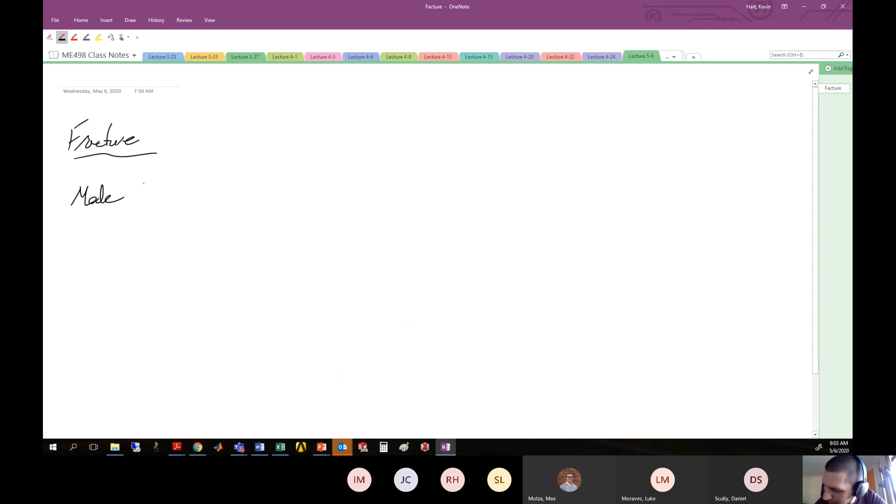All right, so we're in the middle of our fracture mechanics discussion, and we were really looking at mode 1 fracture of composites. I showed some real life pictures of the tests in action for this mode 1 testing of composites, so I just want to reiterate what those look like.

You've got a sample that looks like this, which is the double cantilever beam sample. I showed what one of these is, kind of in my hands, in class on Wednesday. So I've got one here. I wish I could pass it around to you guys, but I can't, because then we would all get a virus, and that's bad.

The general idea here is that you've got this composite that is here—maybe I should do that in red. Here is the composite that you've created. Then you put into it a pre-crack, this initiation crack, usually with some thin Teflon piece during the manufacturing process. Then you apply piano hinges to it by gluing or epoxying them on, and when you pull on those piano hinges, the sample opens up in mode 1.

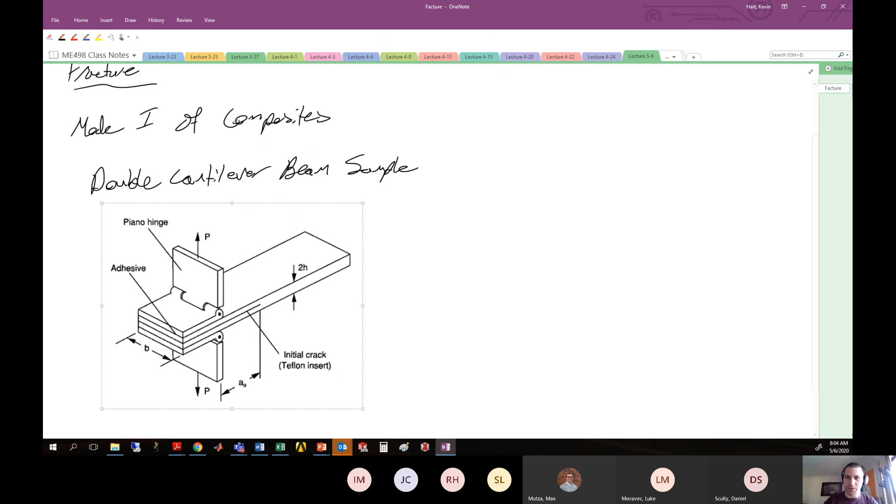So when you pull on those hinges, you get something that looks like this. Here we have things like initial crack length. Here, this is the applied load. Here, this is crosshead displacement. And here you have width.

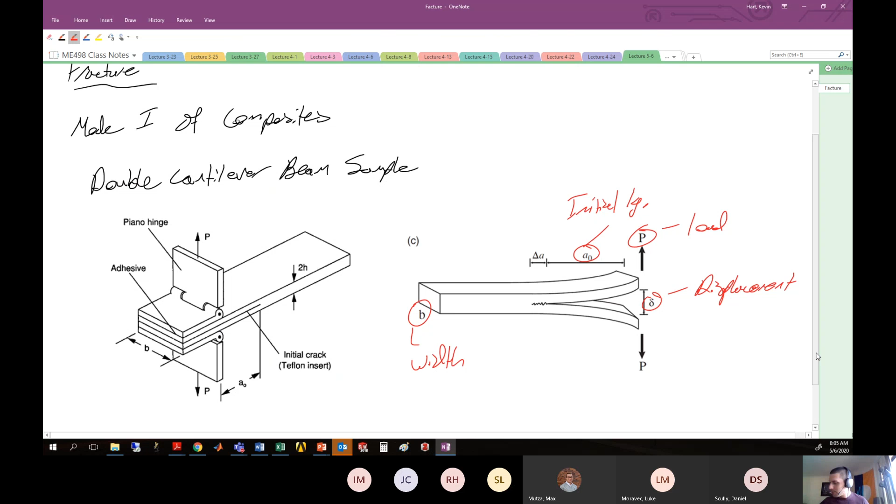So these are the common sample geometries for mode 1 fracture testing. If you ever do mode 1 fracture testing of composites in your life, you will make a zillion of these. In graduate school, I probably made, I don't know, 300 of those things, maybe more. Yeah, many, right? Okay, so there you go—that's the double cantilever beam specimen.

When you pull on that and test it, you're going to track the crack and how it propagates on the side of the sample, then marry up crack advance with load and displacement to calculate critical strain energy release rate. So data that might come from that is going to look like this.

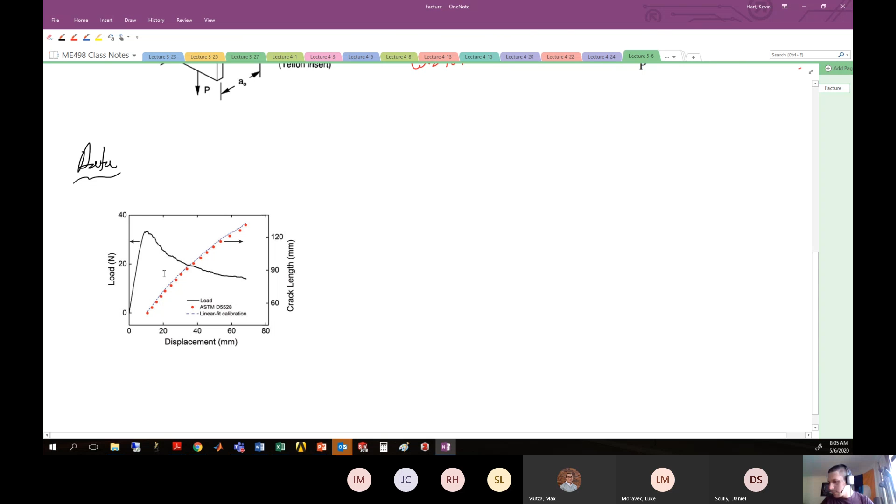All right, we're in black here. We have the load displacement curve. So we're loading, loading, loading, loading. And then at some point, we're getting to a point where the crack is now going to propagate.

So we're pulling, pulling, pulling, pulling. And then all of a sudden, we get some crack advance starting to happen. And right when this point occurs, the sample is relieving itself by creating a free surface.

And so we're moving down here and we're looking at, all right, what is the current crack length? So that's kind of the right-hand side y-axis here, as we are opening the sample up. Okay, so you can match each one of these, like 5 millimeters of crack advance,

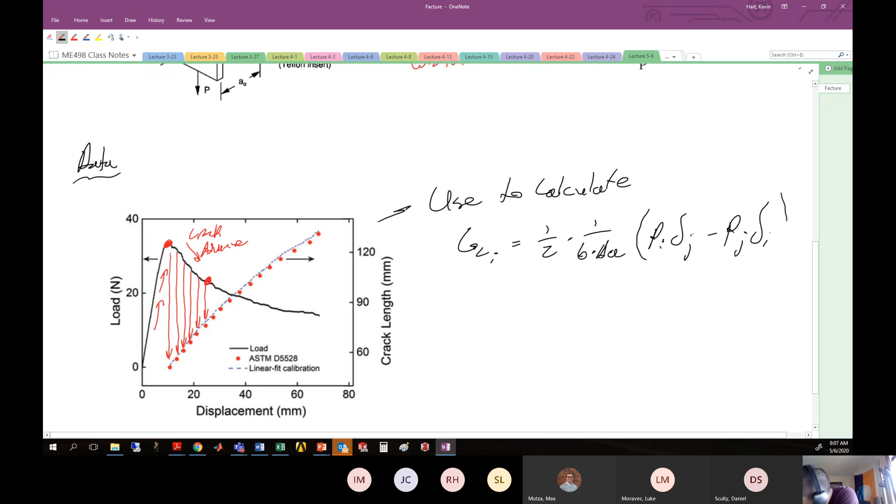with a various load displacement value. So here's my load displacement value for a crack length of there, and you can use all this information to calculate the critical fracture toughness of the ith event, which we said was GCI, here equal to 1/2 times 1 on B times delta A multiplied by PI delta J minus PJ delta I. All right, so there's your fracture toughness, your critical strain energy release rate at each individual event.

And from there, you can construct the R curve, which plots the crack advance delta AI versus GCI. And this gives you a lot of general information about what's happening with the sample.

And that R curve looks something like this. All right, so this is an example R curve. Notice here that it is generally flat, okay, indicating that we have like an elastic material.

And typical values for critical strain energy release rate of composites are anywhere in the 200 to 1,000 range. So here you see 400, and this is specifically for an 8 harness satin weave glass epoxy composite, but it can be, you know, this guy's maybe got an average of like 410, something like that. So you get the general idea of approximately what these values are.

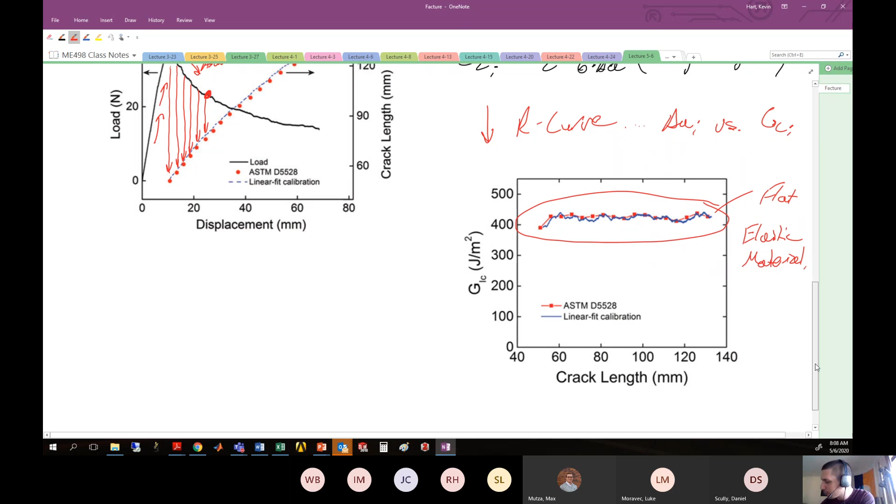And remember here, it's in units of joules per meter squared, the amount of energy required to open a certain crack opening area. All right, so there we go with some mode 1 fracture testing to determine critical strain energy release rate.

And I promise you, if you do anything in composites developing new materials, you will do so many of these tests. You will be sick of them by the end of your life. You're going to be gluing piano tabs on from now until forever.

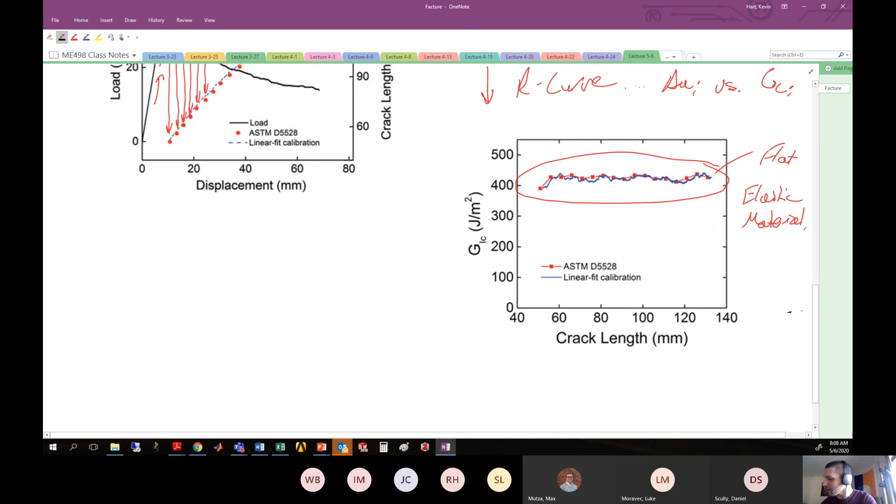All right, so that was all sort of mode 1 stuff. We did an example problem and looked at how this might actually proceed. And I realized there was kind of like a mistake in the order of magnitude of the example problem. So I was in the process of uploading or re-uploading the notes when lecture started.

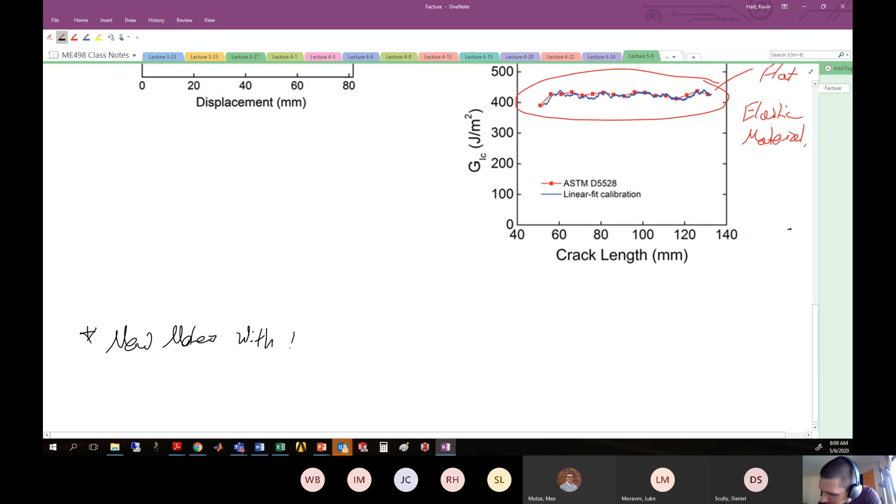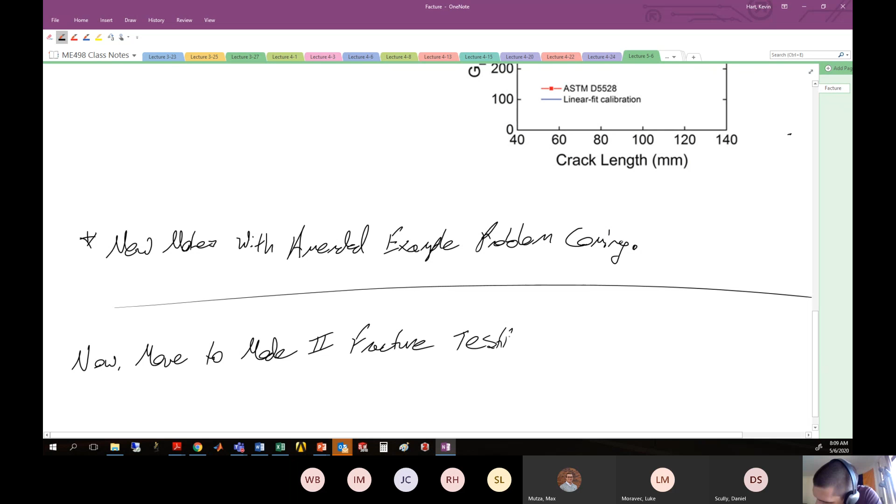All right, so moving on, that was mode 1 testing. Now we want to go to mode 2 testing. And so mode 1, we had the double cantilever beam specimen that was the specimen of choice.

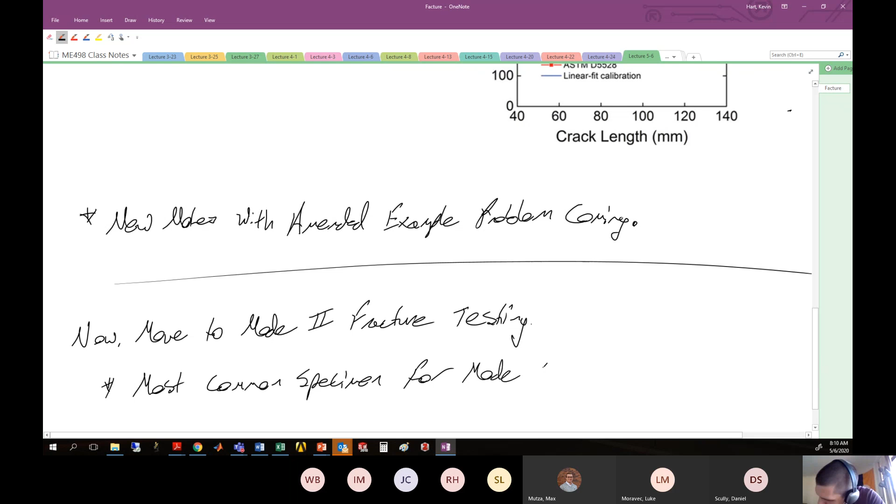And I'll say here, the most common specimen for mode 2 test is what's called the end notch flexure or edge notch flexure, all right, often abbreviated ENF. All right, so let's take a look at what that sample geometry is.

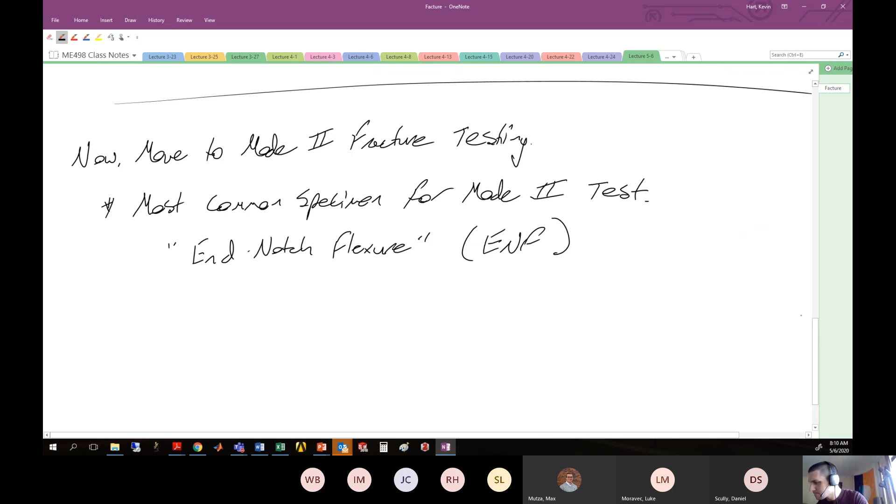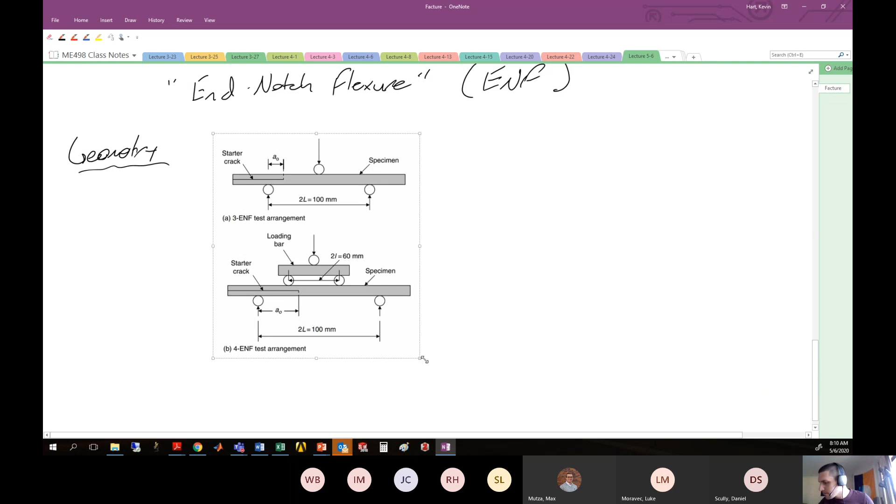All right, so the geometry looks something like this. All right, so this looks a little bit different than the mode 1 test. So the mode 1 test, you just take this guy and pull it open in tension, okay? For the edge notch flexure, you're actually putting this into a 4-point bend or a 3-point bend configuration. So here we have 3-point bend configuration.

And that's called the 3ENF. And then here we have 4-point bend, or what we can see here is 4ENF, right? Edge notch flexure or end notch flexure.

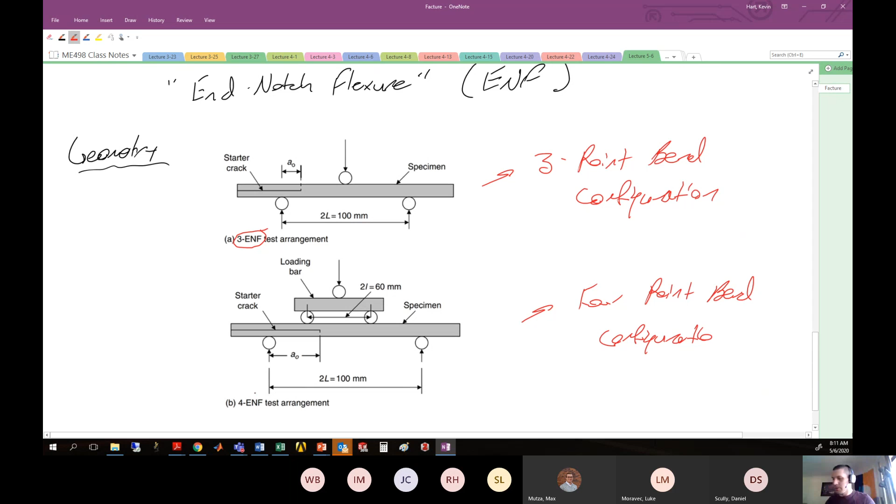So the idea behind this particular geometry is end notch flexure. We put our starter crack on the edge of the sample and it moves its way in. Both of these samples have the same general idea: a starter crack that starts at the end of the sample and moves its way in.

So the samples look basically exactly the same as the double cantilever beam specimen. You've got the starter crack initiating from one of the thin edges and moving its way in. That starter crack is usually made by inserting a piece of Teflon or thin film during the manufacturing process of this laminate or woven structure.

So you have that starter crack in there, and that initial crack length is a0. That initial crack length is the distance between the pin where it's loaded and the edge of the crack. So here we have our loads: here's P on 2, here's P on 2, and here's P, which is being applied to this specimen. So what's going to happen here is just like the deck of cards example.

I got them today. All right, so I'm gonna move to the document camera. Actually, my laptop camera. Where's Teams? Where are you?

Okay, I have props today. So this is a stack of cards, right? The idea here is that if I put this into a 3-point bend, which I'm going to do right now, each one of those layers is like sliding against each other. Might be a little difficult to see, but hopefully we can see that.

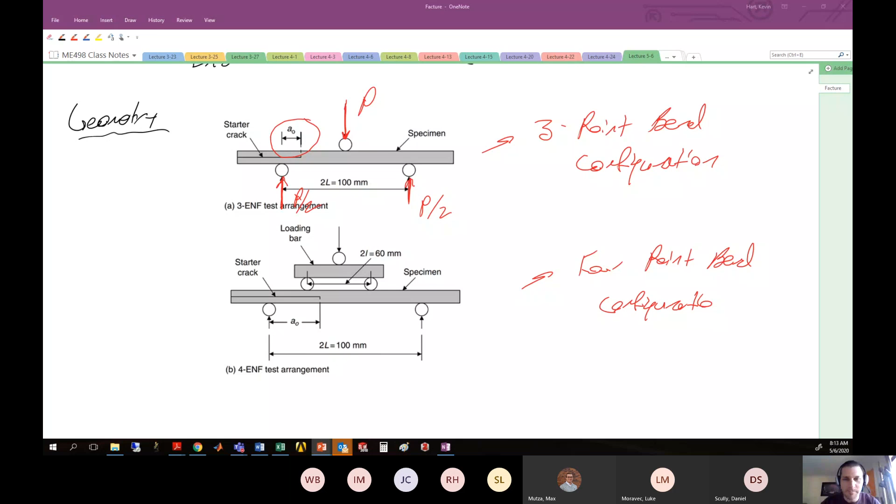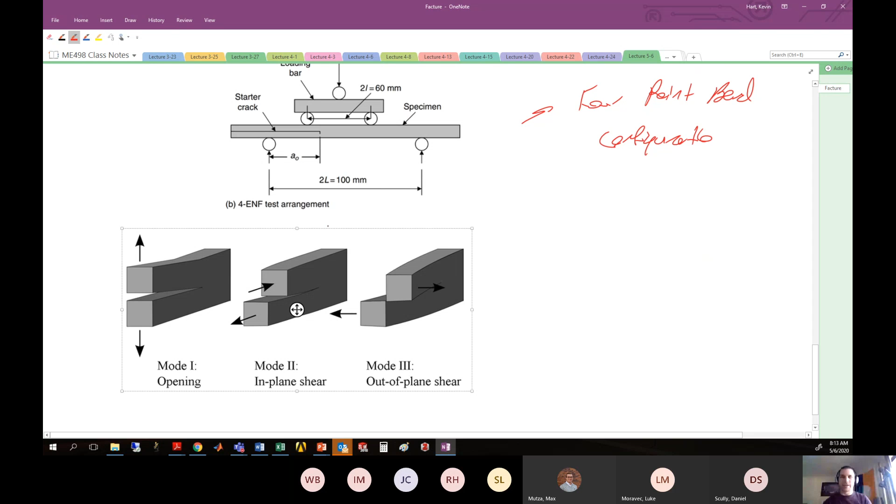So that's what's happening with this end notch flexure sample. Right at the midplane here, these guys are trying to slide against each other like this. That's that kind of shearing type failure.

So you can do this in 3-point bend, you can do this in 4-point bend. 4-point bend is more common because of how the stress distribution is distributed inside of the piece. But generally they're more or less the same. So these are the general samples and what they look like.

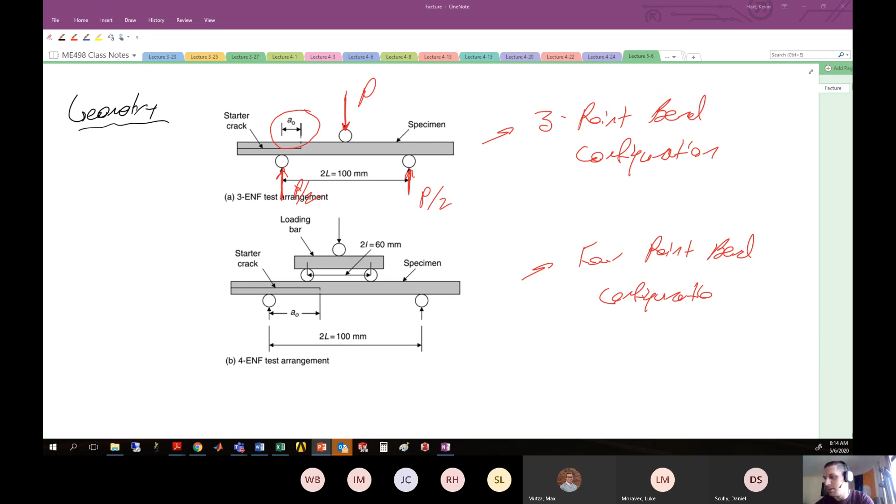Back to it. The same idea kind of holds here: when we apply this bending load, we're going to supply energy to the sample. So the analysis is more or less the same. I'll say 4ENF is more commonly used.

And that's because of a more stable stress state.

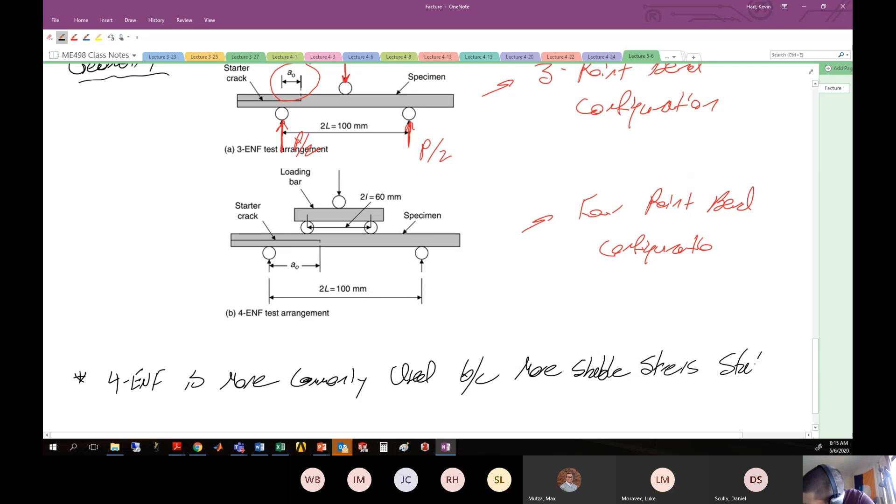Just to remind you what it means to be in 3-point or 4-point bend, go back to your bending moment diagrams. Here's the moment as a function of x, here's the moment as a function of x - this is for 3-point bend, this is for 4-point bend down here. Your bending moment diagram for 3-point bend looks something like this. For 4-point bend, it looks something like this.

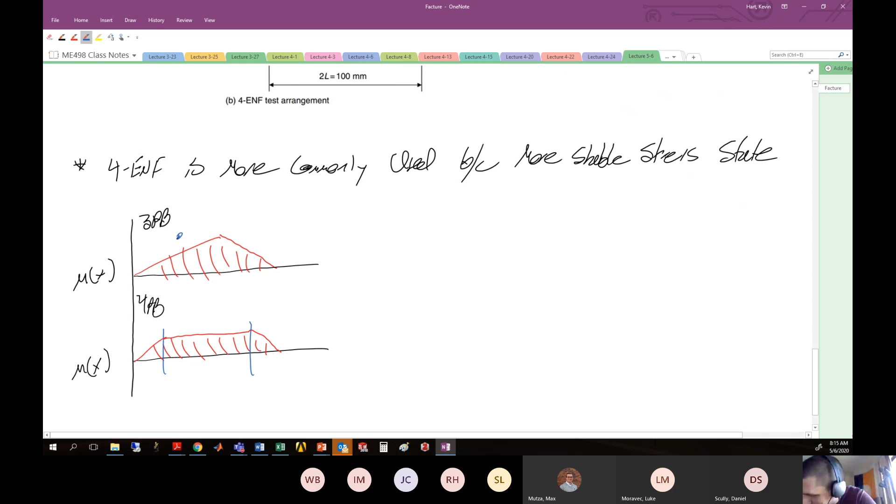So what I mean by it's more stable is that if you're trying to propagate a crack in 4-point bend, if you have a stress state that is constant inside of this region, it's much easier to handle. As opposed to, let's say my crack is here and then it's moving a little bit, now it's here, moving a little bit, now it's here - well, I'm changing the stress state at that particular location.

Not so great. And since we're a little bit more concerned about shear, the shear diagrams are also telling. So remember your shear diagram, something like V of x, for 3-point and 4-point bend. For 3-point bend, you have something that looks like this. And for 4-point bend, you have something that looks like this.

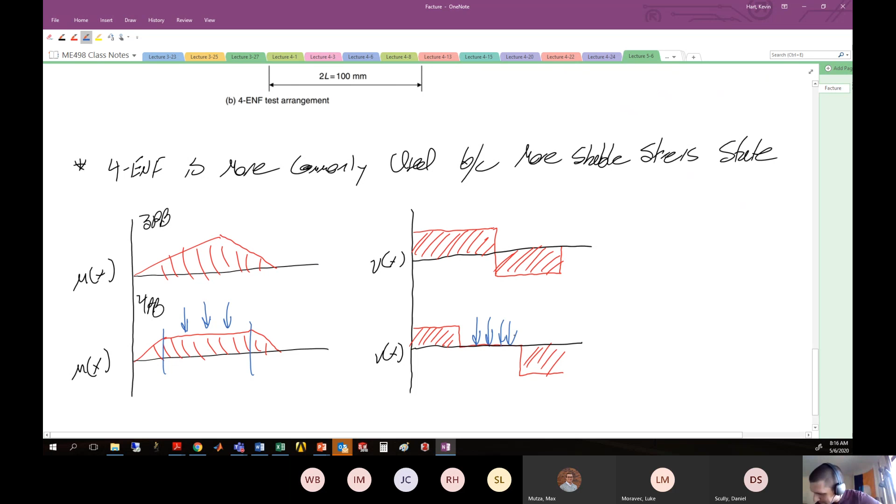So remember back to your statics days where you drew these shear and bending moment diagrams. For 3-point bend and 4-point bend, you have moment and shear diagrams that look something like this. It's a little bit more stable to be testing a composite in 4-point bend in this region here, because your stress states are generally steady. Hopefully we see and understand that. So 4-point bend is most commonly used. Now, the idea of what we're doing here is more or less the same.

We're supplying or putting work into the sample by loading it in this bending mode. And the energy that we apply to it through this external work has to be balanced by the elastic energy and the energy from fracture. So we'll say if brittle...

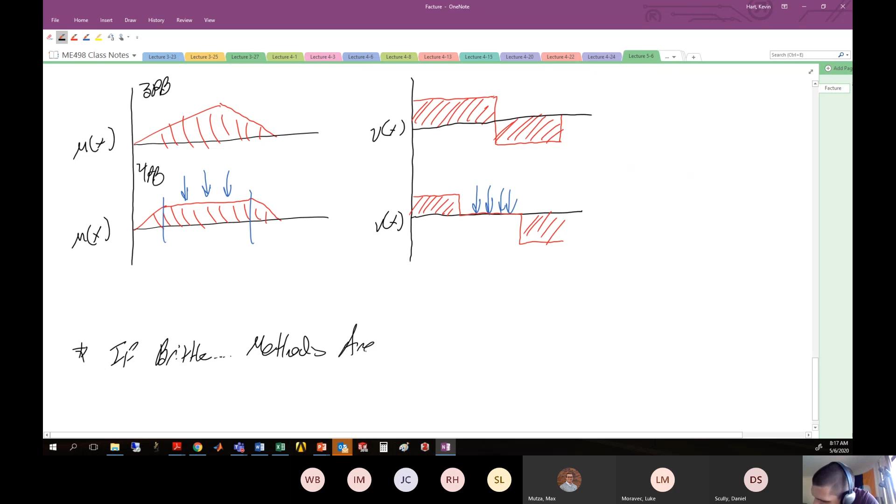Methods are the same. That is, the total work that we put in has to be equal to the elastic energy plus the energy of fracture, balanced by elastic energy and whatever work we did for fracture. So the general idea here is the same. The energy of fracture D is equal to the total work minus the elastic energy that we recover. It's the same general idea, and we saw this with the double cantilever beam specimen.

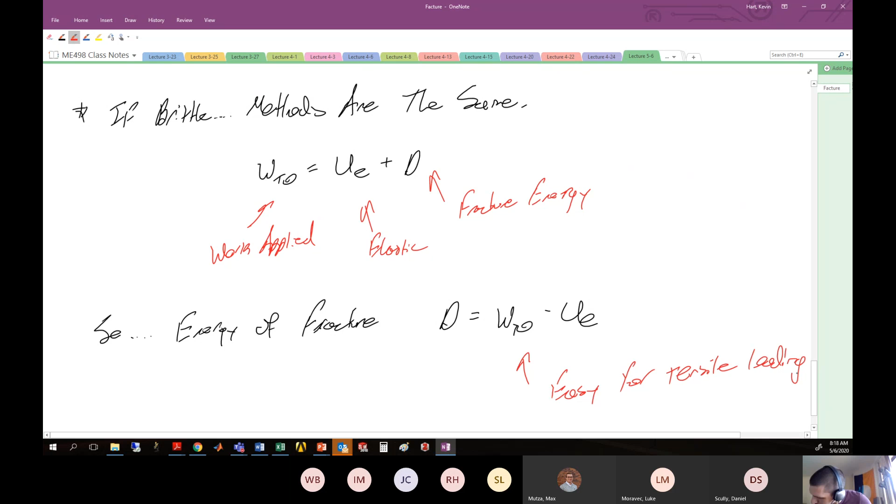Now, for simple tensile loading, the amount of work that you put in is easy. We know that's just the integral of load over displacement, d delta. That's easy. Now, when we're talking about applying bending moments to a piece, the work that is applied is more complicated, okay? And that's because we have different stresses at different points in the piece, and how do we handle that and manage that?

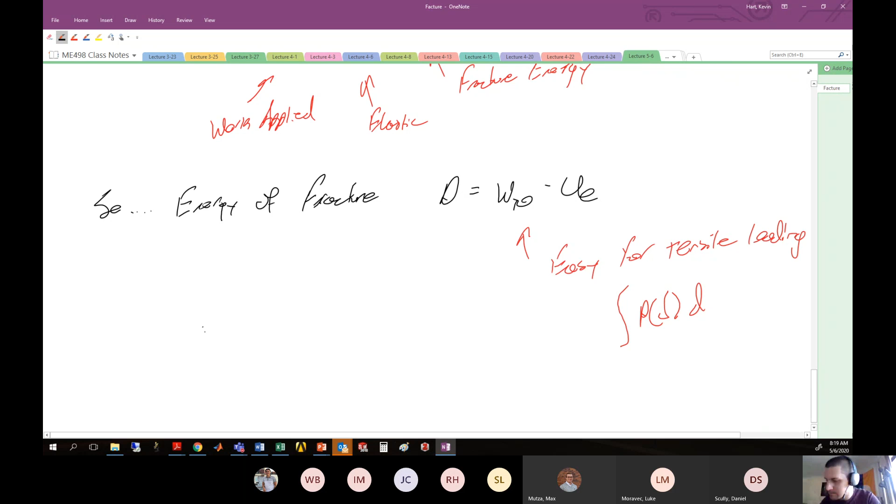Well, you can go back to maybe you talked about strain energy in 3005 - I think they've cut strain energy out of 3005, it's a little disappointing to me. But there's a general expression for what the strain energy is if you apply various forces. So generally we need...

What is this total work term, to sort of solve the equation up here. If we're trying to solve that particular equation, we need everything on the right-hand side there. The elastic energy we recover, that's easy - that's just the energy under the load displacement curve. This total work that we apply is going to be a function of the forces and stresses that we apply, so we need some expression for that particular piece.

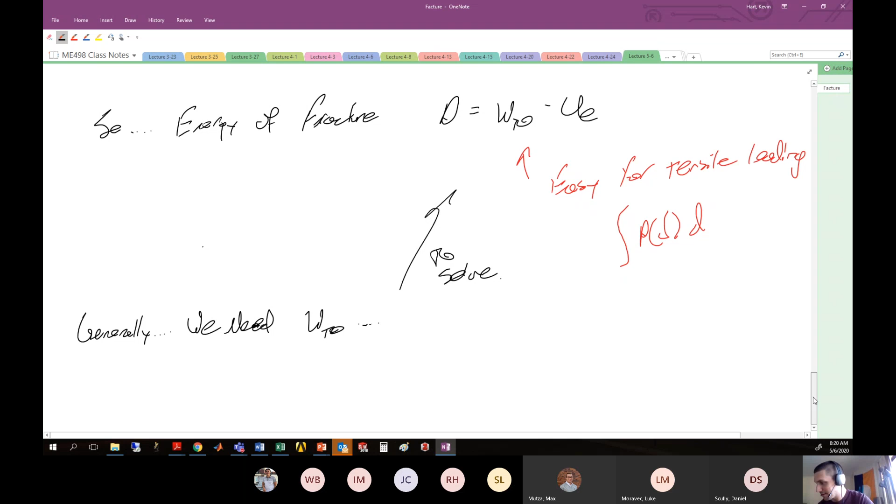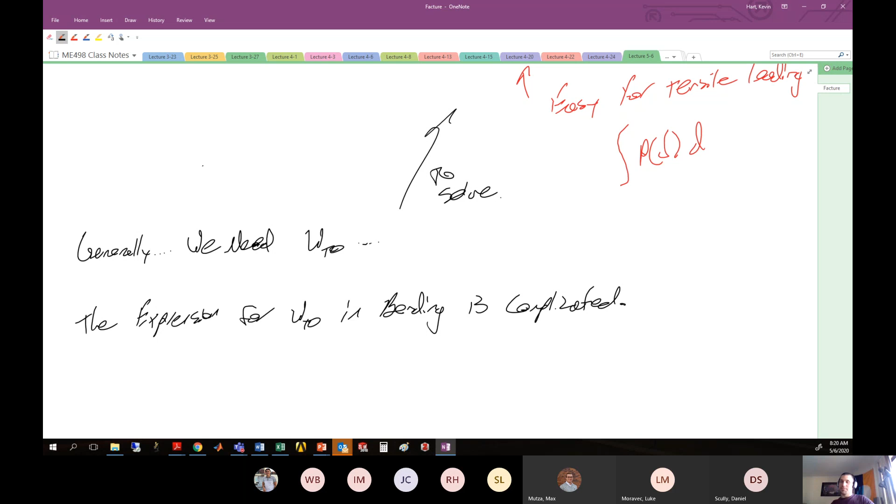And I'll say this expression for the total work in bending is complicated. We could plow our way through the algebra, plow our way through the integrals if we wanted to, and make our way through it, but I don't think that's really a useful exercise.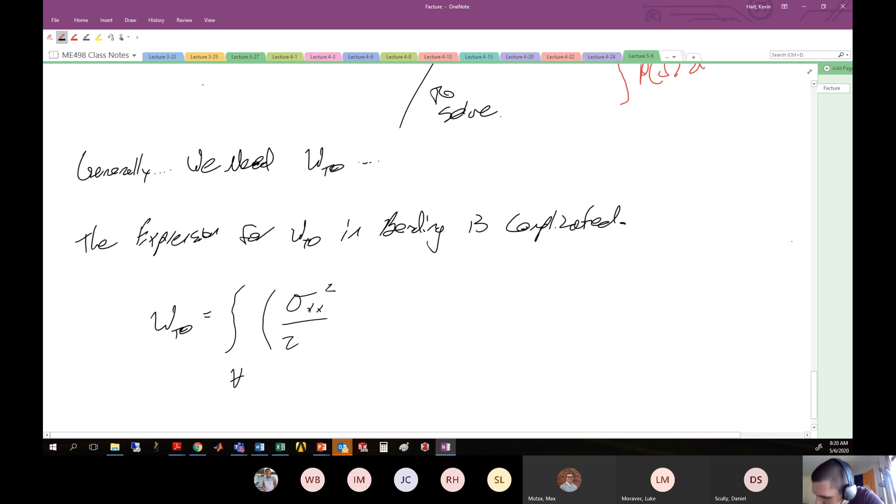Generally, the expression, because you have both a bending moment and shear, is something like: the total work is now not being the integral of the load over displacement. It's actually the integral over the volume V of the stress in the x direction squared over 2 times the modulus in the x direction, plus the shear stress that we apply in xy, or in our case xc, over 2 G-xy. This is the actual work that's applied if you have a sample that looks something like this, in this X-Y direction.

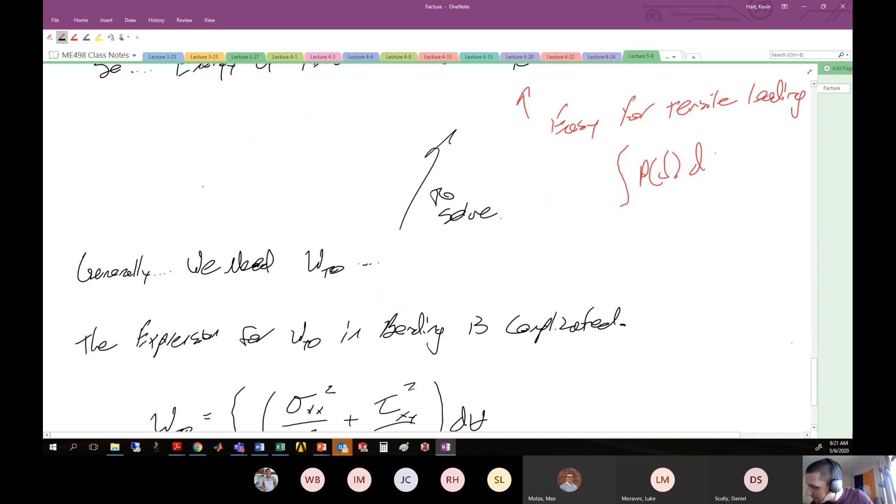So if your sample geometry is there and that's your XY direction, this is your expression for the total work on the piece. That looks significantly more difficult and more complicated than the original expression we had for the integral under the curve for the particular work.

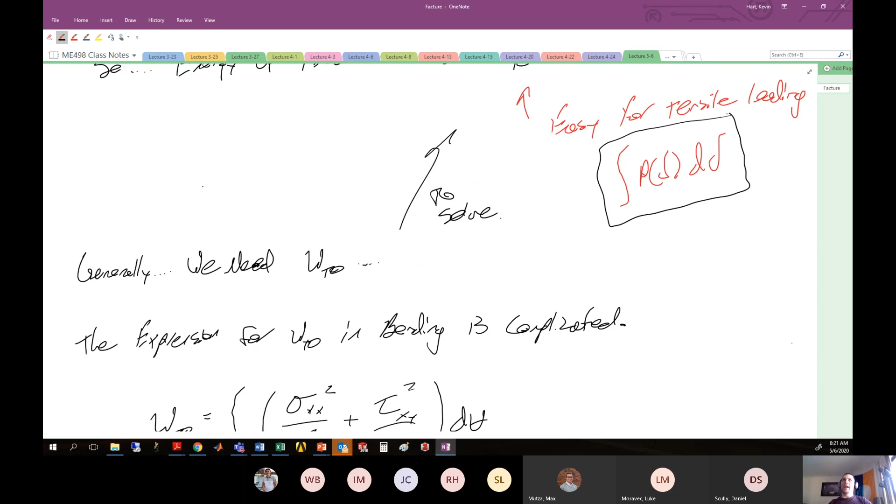In tension, it's easy to understand - it's the area under the curve that is the total energy that's applied. When we do bending analysis, that's not nearly the case anymore. It's much more complicated, and your notes actually go through this in more detail.

The notes expand on this. I don't think it's a particularly useful exercise to go through what is the stress state, what is the shear, the normal and shear stresses at the crack tip as this thing is going through, and then write them in terms of sample geometry and all that sort of stuff. We could do that, but I don't think that's a good use of our time. So instead I'll kind of just cut to the chase.

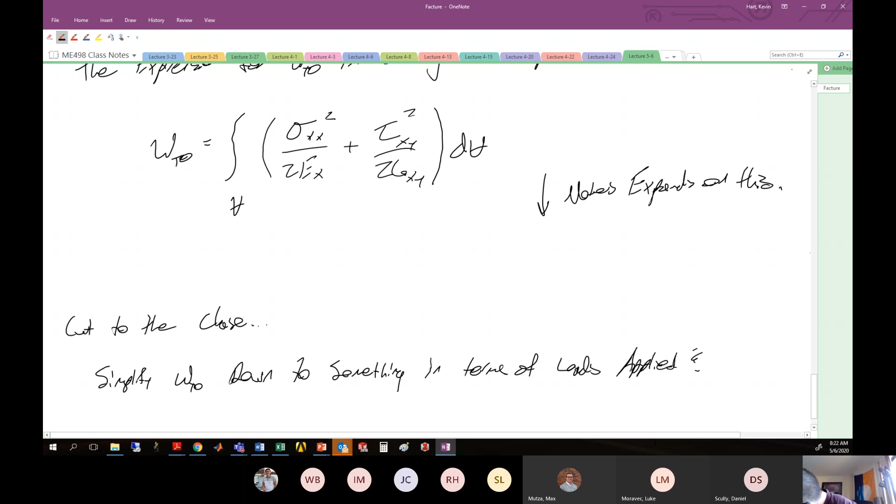I'll say cut to the chase - the idea is to simplify the total work down to something in terms of loads applied and sample geometry.

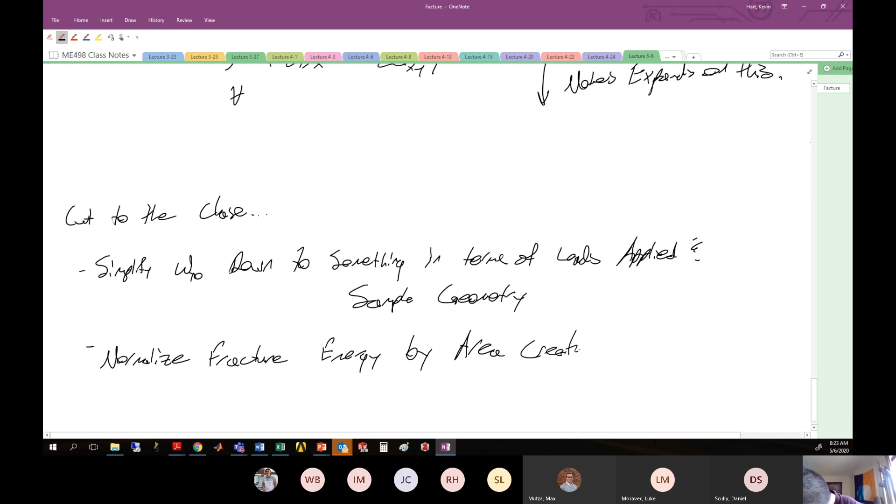And then we'll normalize fracture energy by area created to get G2C. This is the critical strain energy release rate in mode 2. I'm just going to present it here without full derivation, but hopefully we get the idea of what's going on here.

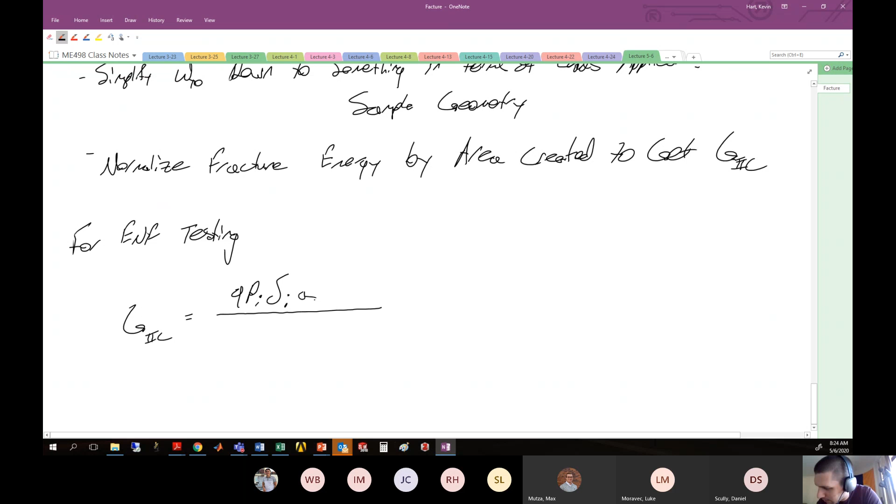That is for end notch flexure testing, with the geometry described above. We have that G2C is equal to the following: 9 Pi delta i ai squared over 2b times 2L cubed plus 3ai cubed, plus here. There's your general expression for critical strain energy release rate in mode 2 with an end notch flexure sample. This is good for 3 and 4 point ENF.

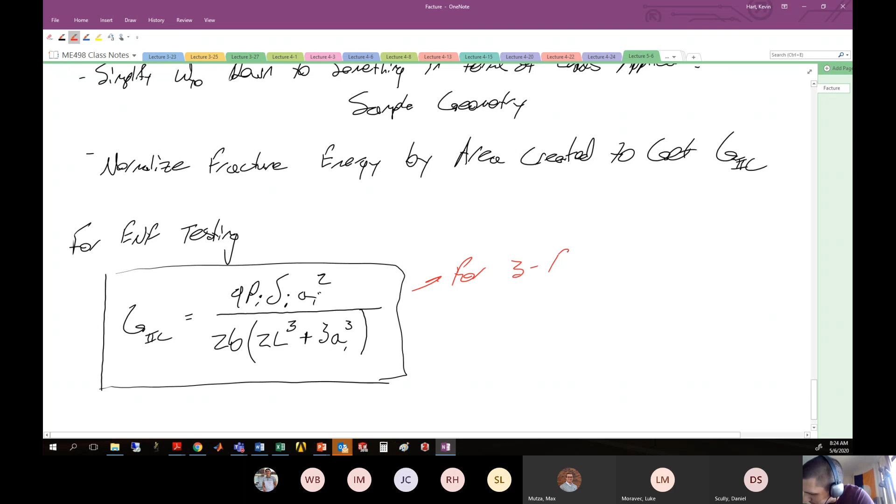So let's explain what these variables are. Obviously G2C is the mode 2 critical strain energy release rate. It's kind of what we're getting after with this new geometry and this new type of test. PI is the load on the sample just before fracture event I.

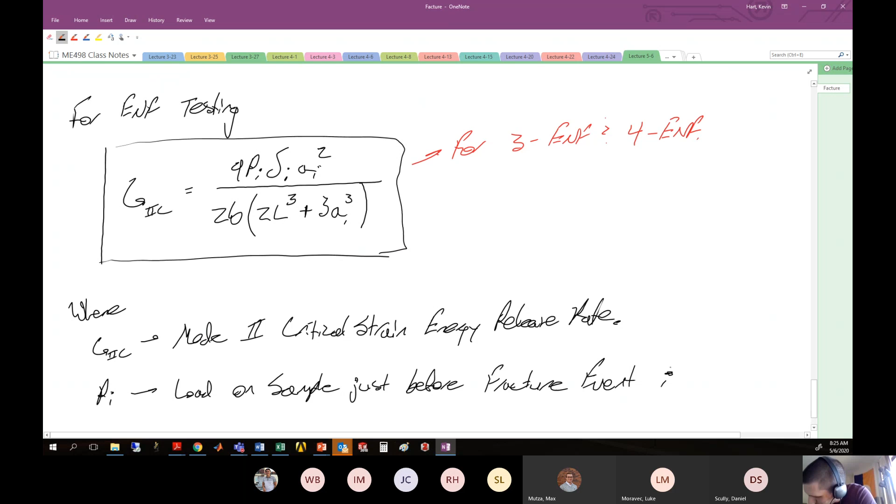We're going to have these discrete failure events, assuming a stick slip behavior. Delta I is the displacement on the crosshead just before fracture event I. By crosshead, I mean if you're putting this thing into 3-point bend, your piston on the top has some displacement associated with it. This is that displacement - the motion of the pin that's pushing on your sample. Displacement of crosshead just before fracture event I.

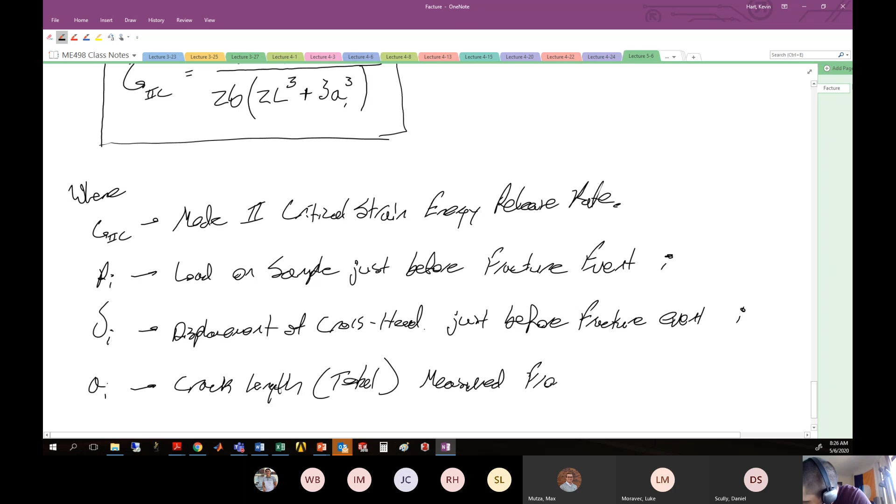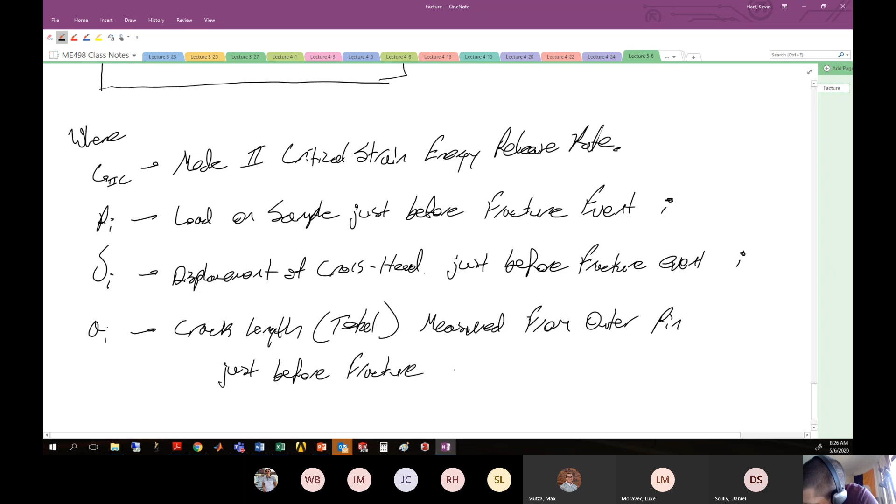Let's continue. We have AI, the crack length - make sure you know this is the total crack length, not some crack advance. They're different. The total crack length is wherever the crack is at that particular moment, measured from the outer pin, just before fracture event I.

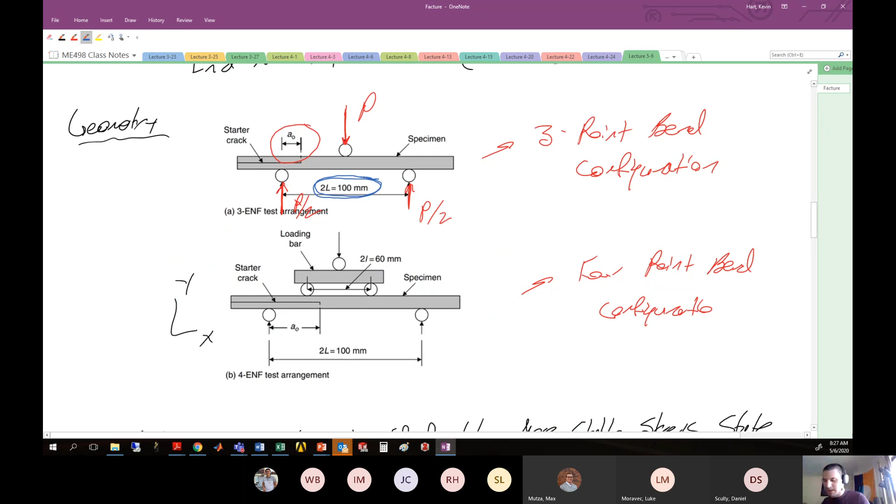Continuing, B is obviously the sample width, into the page. And then we also have L, which is the sample half span. Going back up to our picture, generally the sample has a width of 2L here. So L is the half span, half the distance between the outer pins on the sample. 2L is 100 millimeters, so the half span L is 50 millimeters.

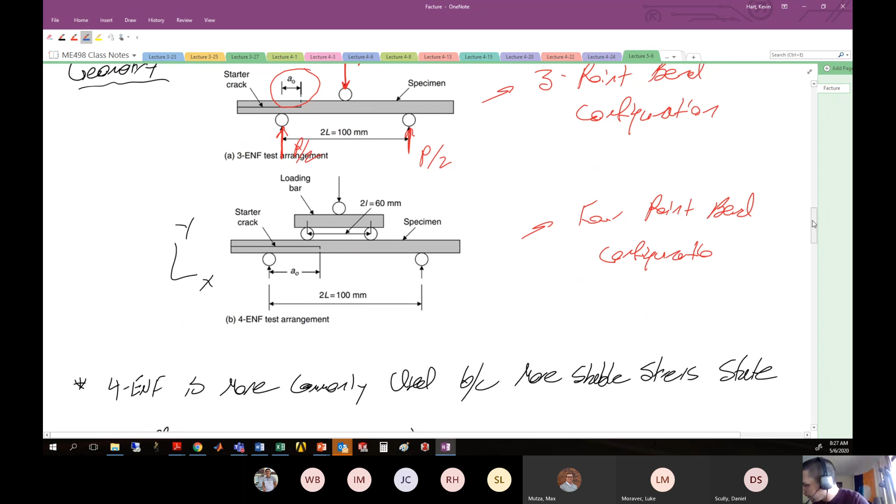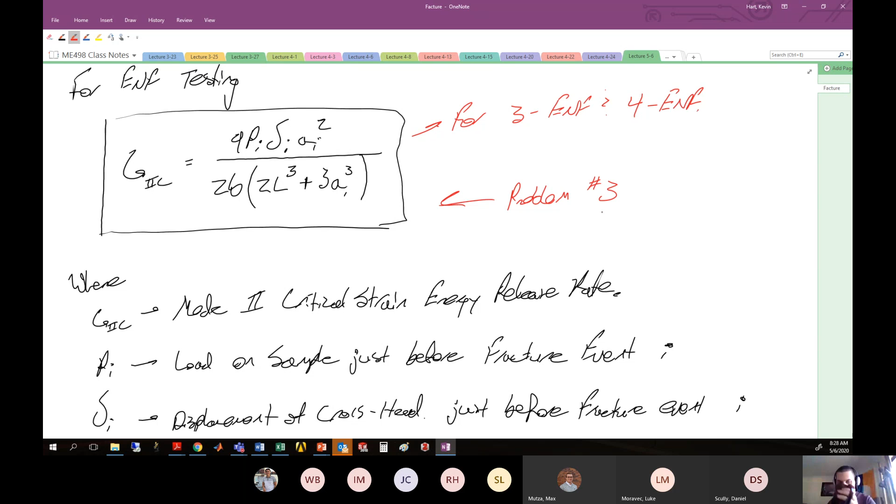So there's the general idea. This is the equation you're going to want to use for homework problem number 3. You're going to look at some actual data, pull off this load displacement and crack length data, punch it into that particular equation, and you should get some values of G2C. So there's your mode 1 and mode 2 testing, the associated samples, and so on.

Just like for mode 1, there is a standardized test for mode 2 fracture. So I'm just going to pull that up here really quick and share that with you guys as well. Let's do that.

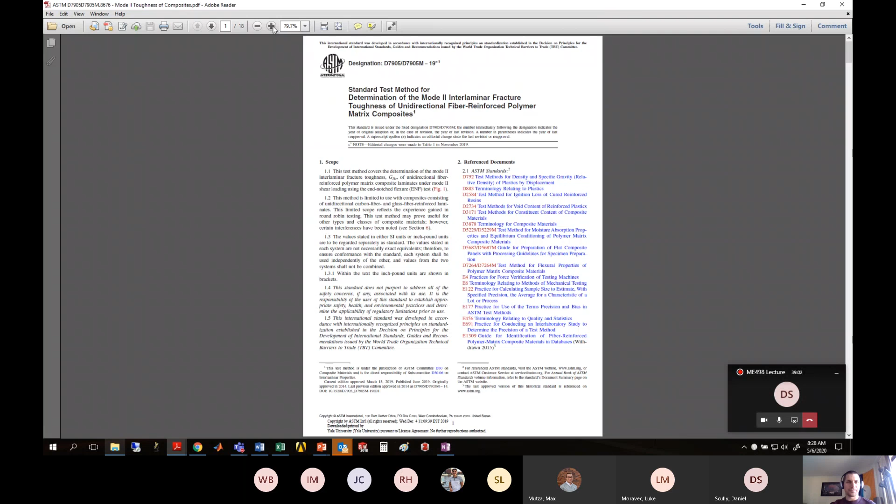Here again is a standard. I've posted this on Blackboard. I really advise you to download this because it's not free. If you go out in industry, people pay hundreds of dollars for this particular standard. So put it on your machine, take it with you. If you ever need to do mode 2 testing of composites, this will be your Bible.

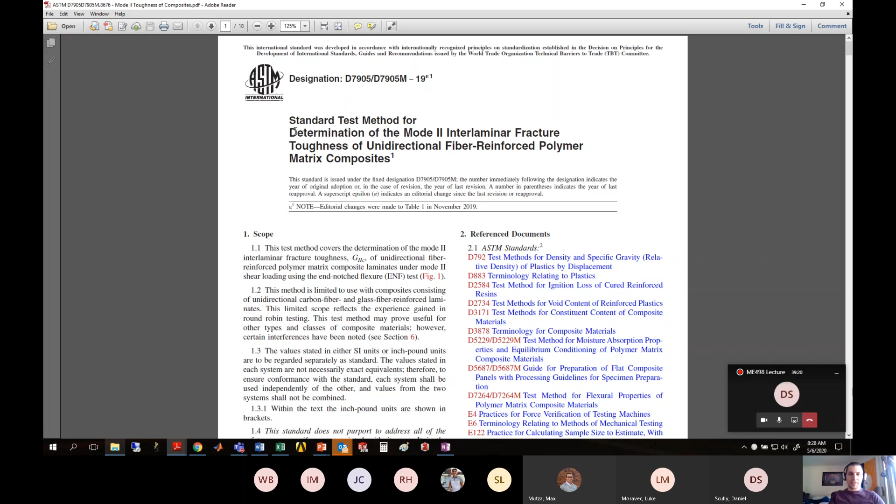Mode 2 interlaminar fracture toughness of unidirectional fiber reinforced polymer matrix composites. All the information is kind of here, and this is our sample geometry. We've got a cracked end here, the pre-crack on the left-hand side, and this is for end notch flexure - ENF, test fixture, and specimen nomenclature. You see it here describes everything associated.

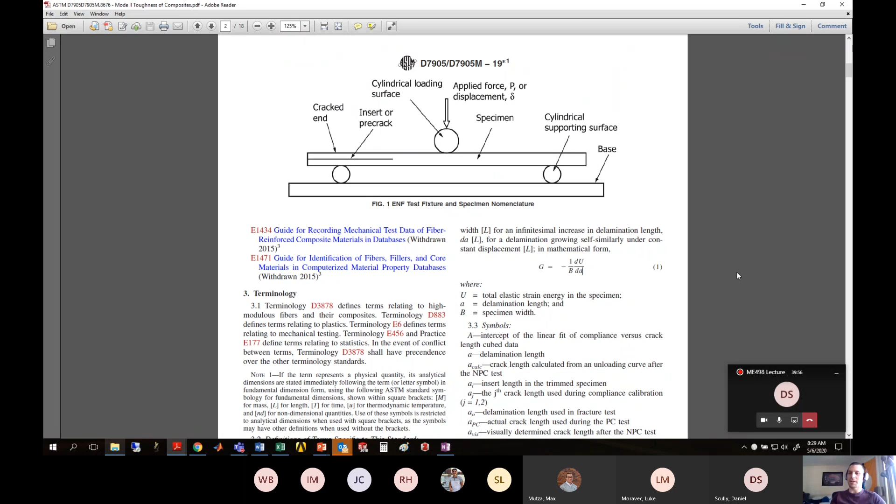So here again, it's indicating that the critical strain energy release rate, G, is 1 divided by the sample width, so 1 on B, times DUDA, the amount of energy required to propagate the crack a certain amount. Same stuff we've been talking about - DU is the change in energy, DA is the change in crack length. This is exactly what we've been talking about so far.

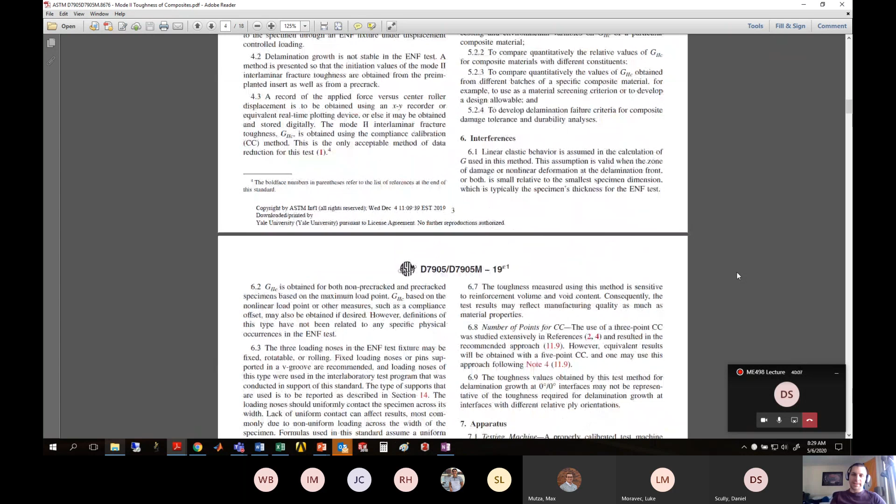Additional information on sample geometry is included. It talks about the apparatus needed, what testing machine, and displacement rates in the range of 0.025 to 1.6 millimeters per minute. It covers the specimen geometry, which should have a span of 100 millimeters and a nominal half span of 50 millimeters, and so on.

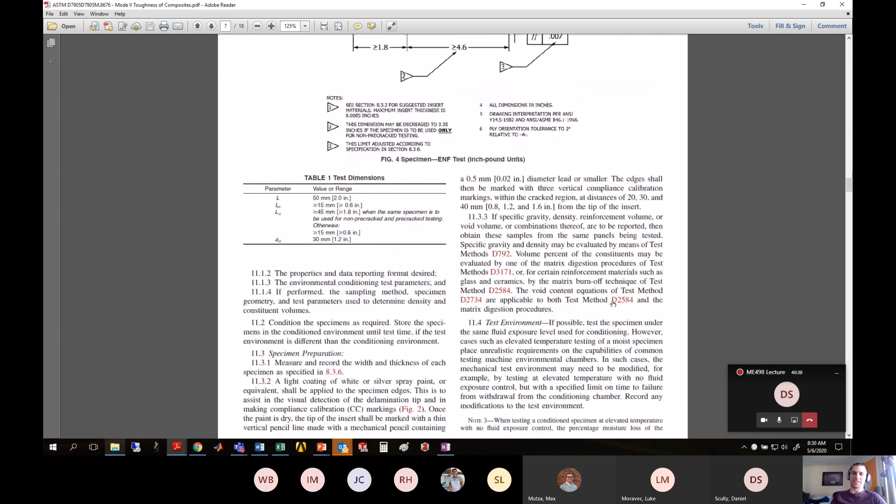All the information about sample testing is contained in this particular standard. It tells you everything you basically need to know, including analysis methods and even surface finishes for the pins and the surface of the sample. It's just insane.

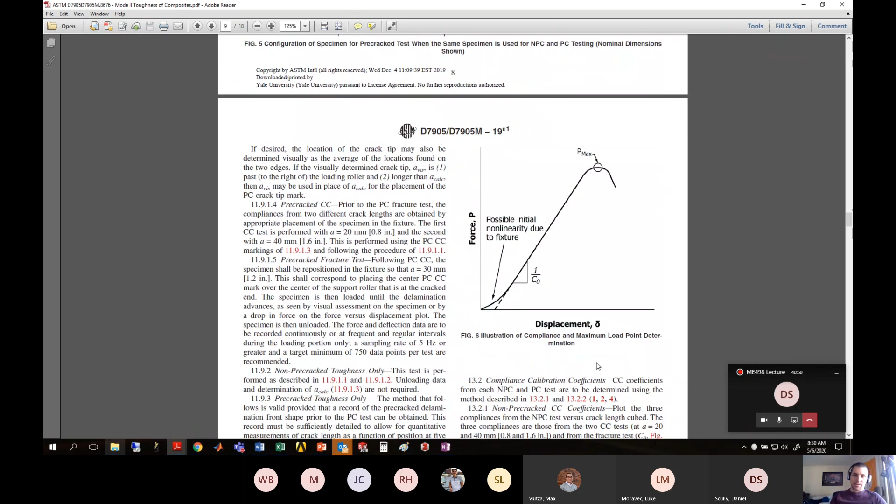This is an example of load displacement that might come off from one particular sample. So here's an example of load displacement that you might see. All right, so there's a standard—download it, put it on your machine, make it yours, own it.

As an experimentalist, I had those as my Bible. I prayed to them every evening. Oh, standards of testing, how I loathe thee.

Now, fantastic, great, marvelous—let's get back to the writing pad.

We've talked about analysis methods for mode 1 and mode 2 fracture of composites. We generally understand that the matrix materials that make up composites are very brittle, and composites will generally fail in fracture before they fail in any of the other modes associated with strength metrics. The fibers inside the composites are not usually the ones that fail most often—it's usually the brittle matrix phase that fails because there's an initiated crack or a void inside the material where fracture can initiate.

Because of that, people have looked at increasing the toughness of the matrix material, and thus the composite as a whole, in a variety of different ways. Over the next lecture and a half or so, I want to look at cool tricks and things people have identified or leveraged to increase the toughness of these composites. We'll look at a variety of examples and the general increase each one might provide should you choose to pursue them. I'll generally label this section toughening mechanisms.

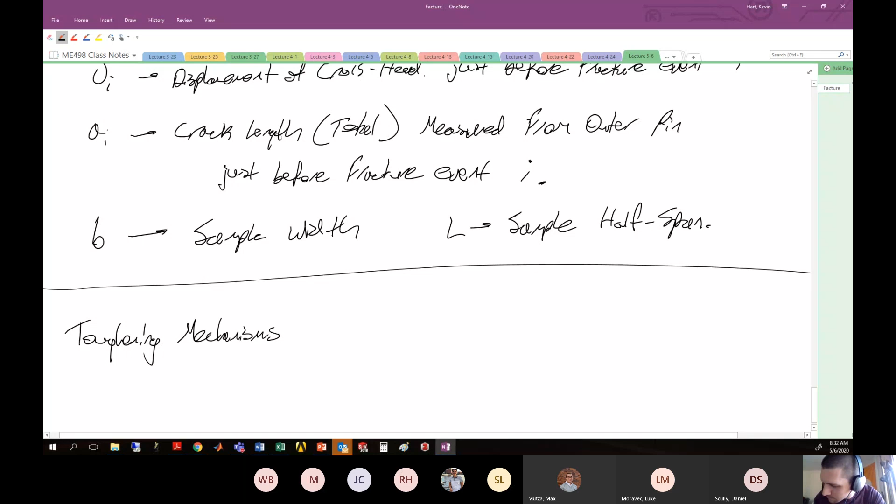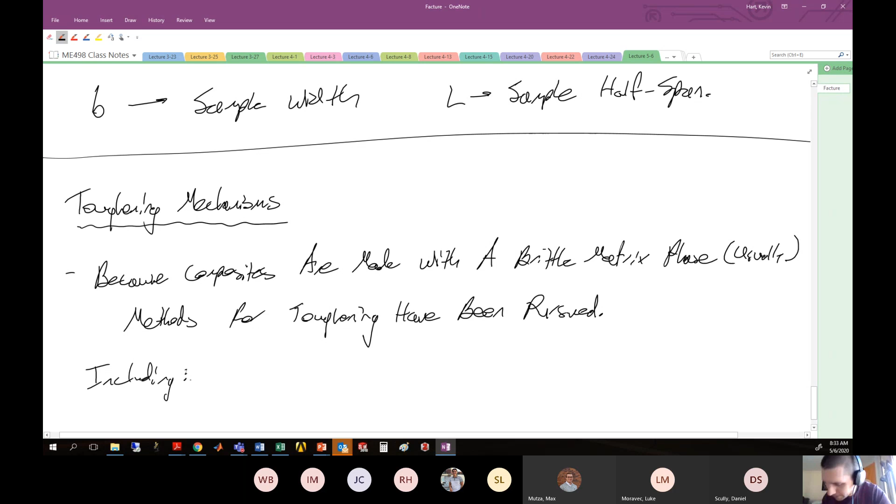Because composites are made with a brittle matrix phase, methods for toughening have usually been pursued. Those methods include—and I'll go into depth on each—the first isn't really a method people have pursued per se, but one that naturally exists in composites: it's called fiber bridging.

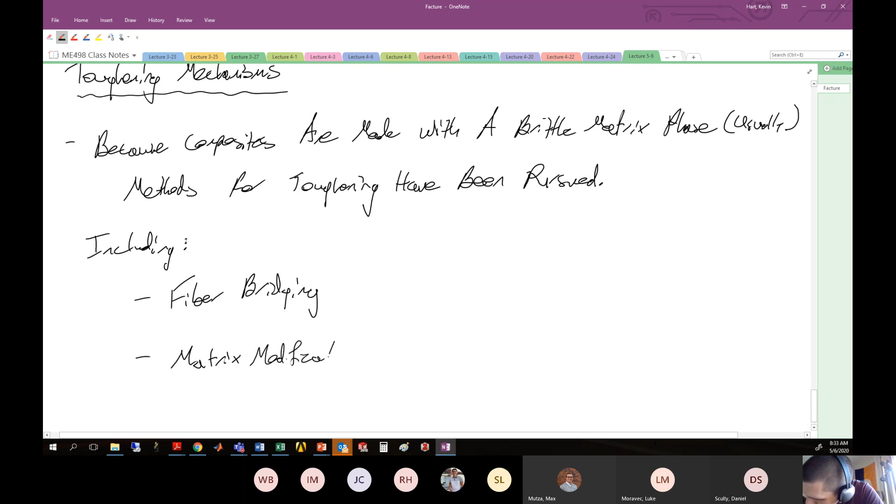Another one we're going to talk about is matrix modifications. That one's obvious—if you can make a tougher matrix, then your composite generally will be tougher.

So, fiber bridging, matrix modifications, and people have also incorporated stitching. If I stitch through my composite, it helps resist the composite from opening a crack because these stitches are moving through. Related to that is Z-pinning, a similar idea, except now instead of stitching, I'm putting big pins right through the middle of the piece.

There's an idea called interleaving—this is the inclusion of very thin thermoplastic layers between the composite laminate layers. If you incorporate, say, a thermoplastic urethane between individual layers of the laminate, you really toughen up the interface between the two layers. That's interesting, except there's a drawback: it decreases the overarching mechanical properties of the piece. There are also architectural modifications.

Oh, spelling is hard. Oh my gosh, I'm an engineer—fabric. Architectural modifications, yes.

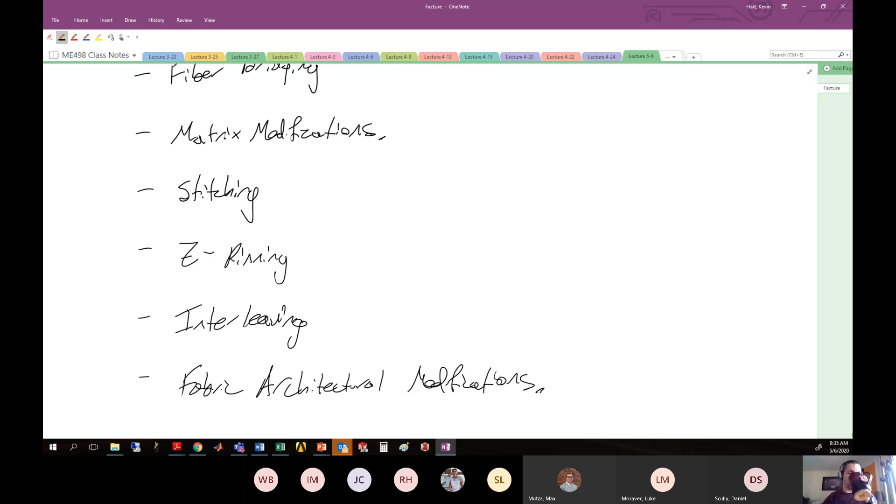What I mean by that is, can we change the weaving pattern or generally the stacking sequence of the laminate to increase our toughness, and how much can we really affect toughness by modifying the stacking sequence some amount? Let's move on and start first with this fiber bridging idea.

Composites are made of continuous fibers and a matrix reinforcement. For any two layers inside the sample, we've assumed in this class that when two layers separate, there is nothing connecting those layers. We say the crack has gone through and they're completely separated.

But in actuality, what happens is the matrix will fail and the cracks will separate, but there will be some individual strands of fibers from the bottom layer that migrated into the top layer, and vice versa. So as you pull this crack open, there are still fibers hanging on from the bottom layer attached to the top layer, and some fibers from the top layer hanging on to the bottom layer.

Think of it almost like Velcro, where these fibers are kind of attached to each other through the crack. This is what's known as fiber bridging. I'll bring in a picture of what this actually looks like.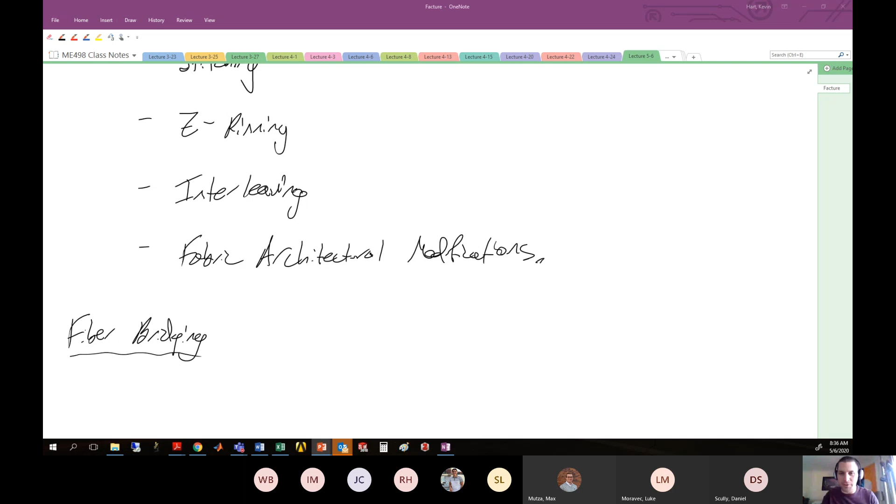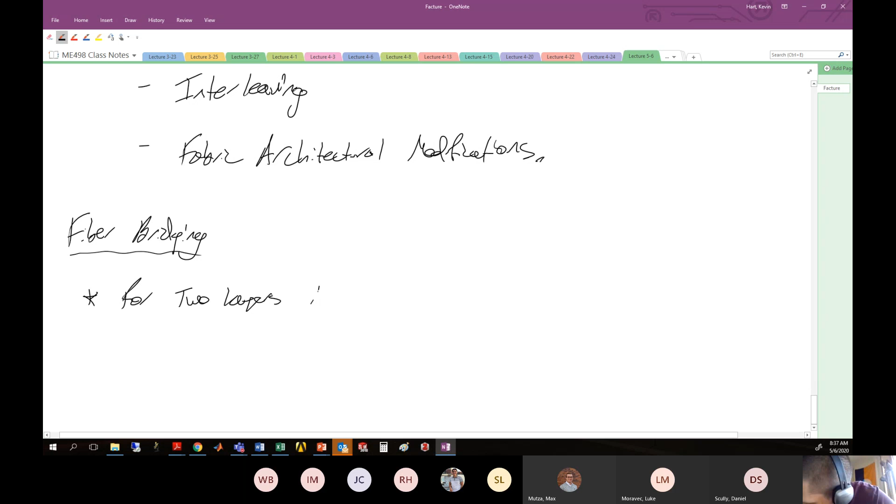For two layers in a composite undergoing separation through fracture, some fibers may still bridge the gap.

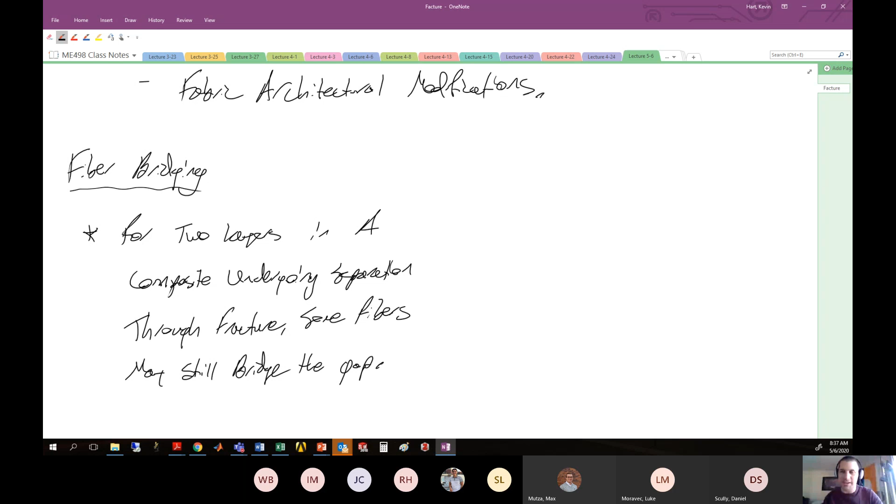This adds to the toughness because those fibers don't want to let go. This increases the toughness generally of the sample. Let's take a look at what this actually looks like in reality.

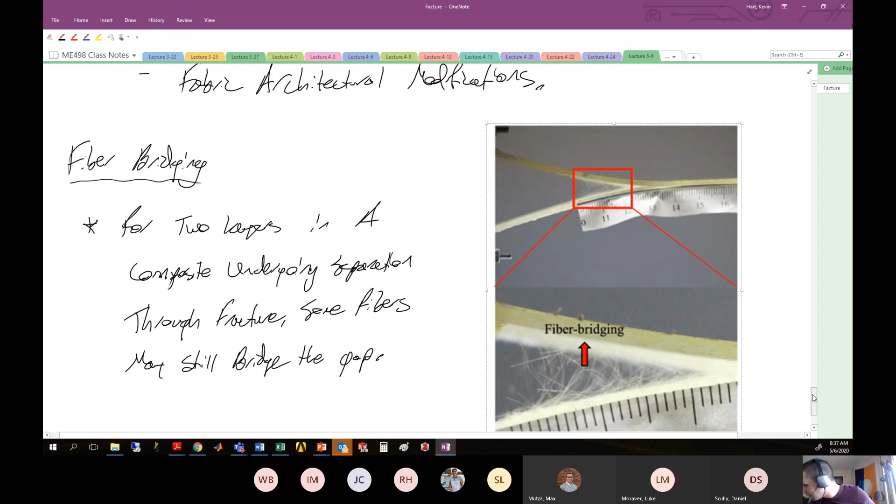Here's an example: this is a double cantilever beam specimen that's being pulled apart. This is a DCB specimen, and it's being pulled apart here and here, loaded in this general direction.

What you see here in the center are all these fibers from the bottom layer and the top layer, respectively, that don't want to let go of each other. All these fibers are commingled in that crack plane as you pull this open.

This example is very extreme, and I think the people doing this test really made a point to increase that fiber bridging by fluffing up the glass fiber mats they were using to create this sample before manufacturing. They put a lot of effort into making this fiber bridging happen. But the general idea is that when you pull open this composite, there are fibers that span this crack plane.

So what happens is these fibers act to increase the toughness of the sample generally.

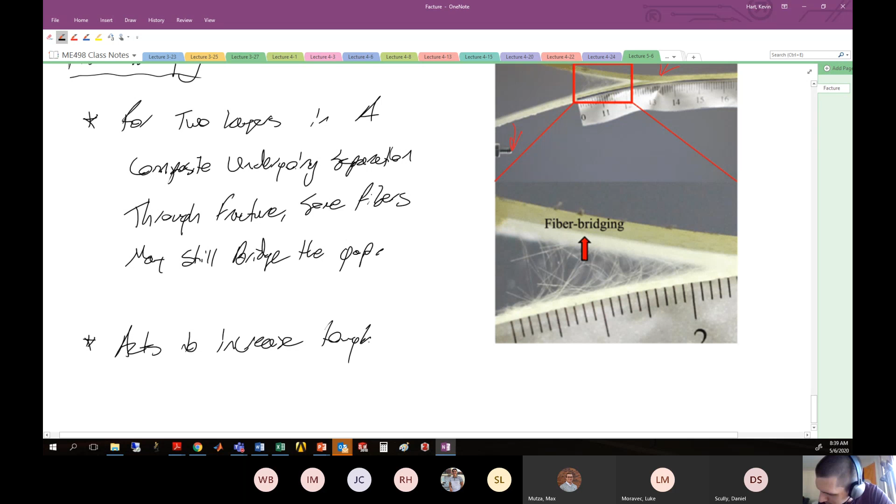Now, what's interesting is that if I'm doing a test, I need to create a sample. When I first create the sample, I put a piece of Teflon into it so that I have a starter crack between two layers. When I have that starter crack there, there is no fiber bridging at that location, since I've made sure of it by including this Teflon piece.

So when I first start the test, there is no fiber bridging. However, as I progress through the test, my fiber bridging increases more and more because I am getting further away from that Teflon insert where the fibers originally were. This leads to some interesting phenomena in the R curve for the sample.

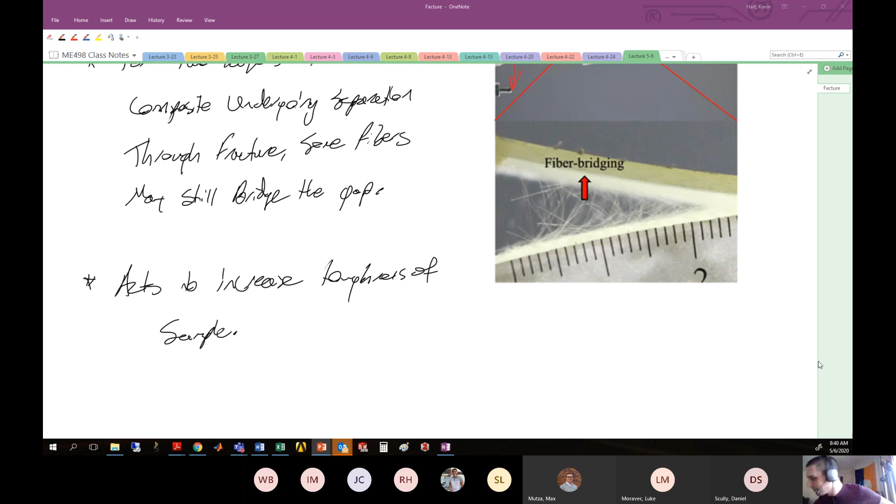This leads to interesting results in the R curve. Remember, this plots G1C versus the crack length a. That's what the R curve is.

Let's take a look at what I actually mean here. Now here's an example of what I'm trying to describe.

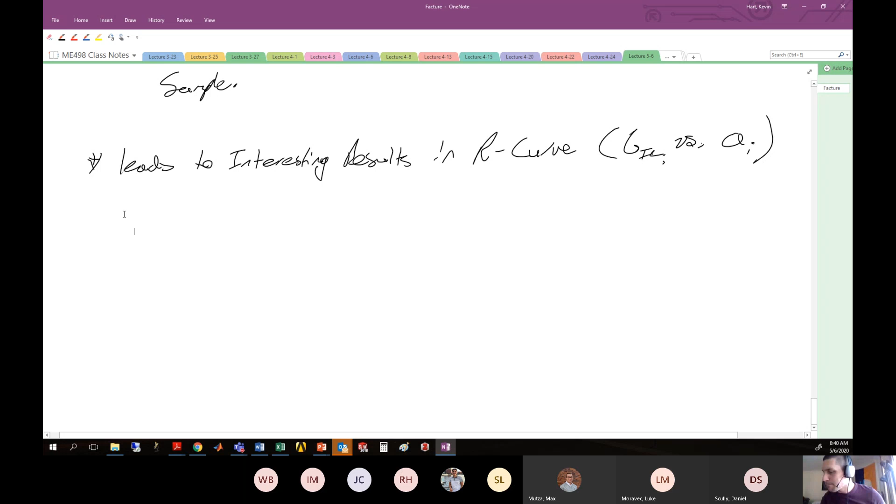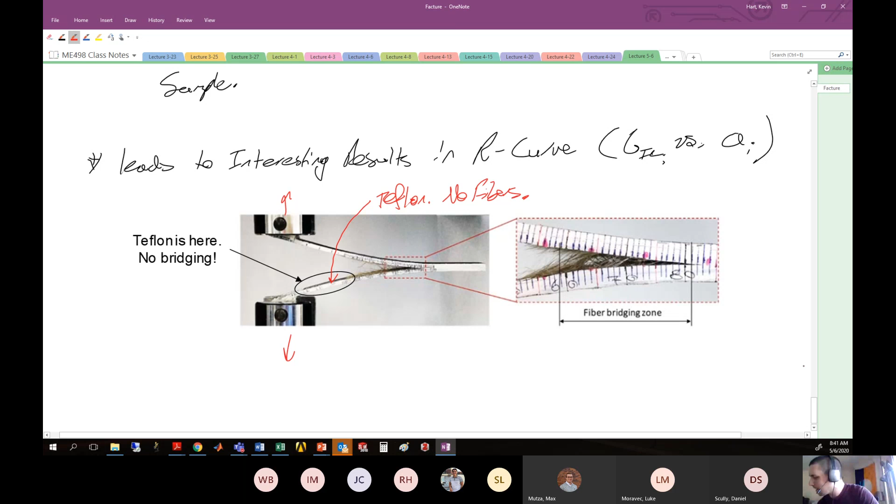All right, so here we are, another double cantilever beam. This guy's being pulled open, and you see all the fiber bridging that's occurring right at this particular location. Initially here is your Teflon, no fibers, and you can very clearly see there's no fiber bridging occurring in that region because the Teflon interrupts it. So right when you first begin testing, there is no fiber bridging. That results in lower values of your critical strain energy release rate because you don't have this Velcro-like effect holding on and causing the sample to stay together.

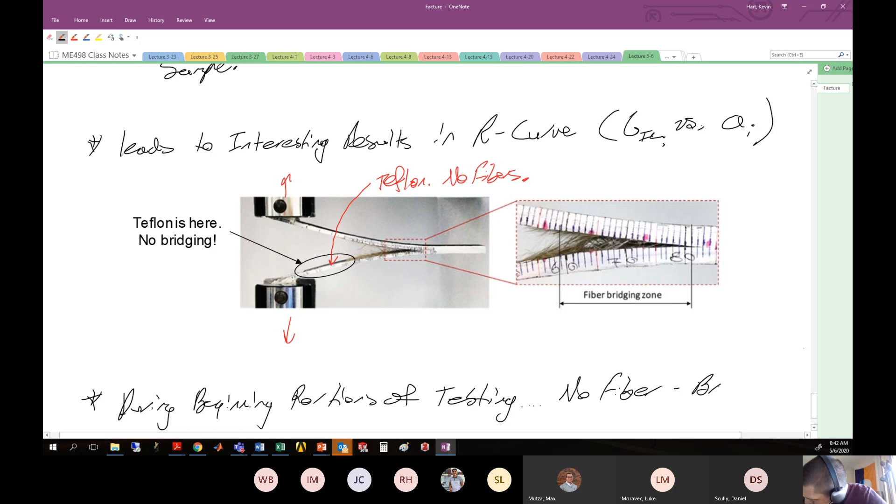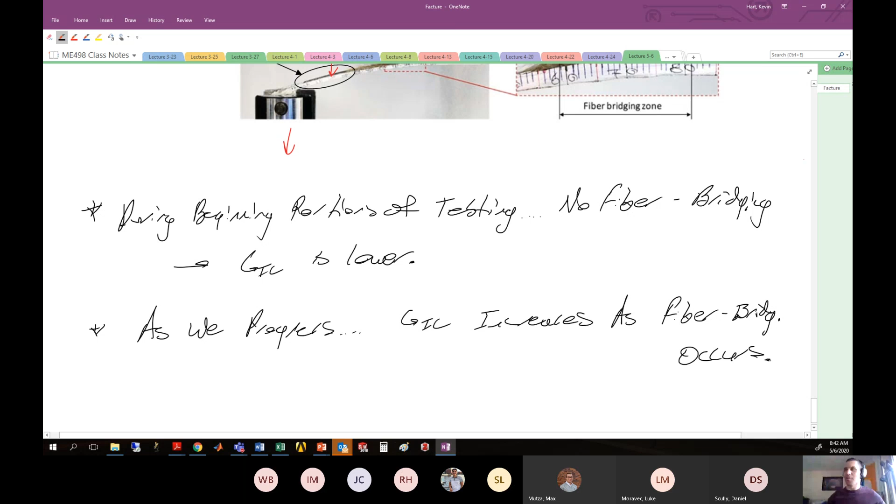So during the beginning portions of testing, there's no fiber bridging, and therefore G1C is lower. As we progress, G1C increases as fiber bridging occurs. Hopefully we can all understand that. Initially there's no fiber bridging the crack plane, but as the crack begins to propagate, more and more fiber bridging will be apparent. This results in R curves, plotting the critical strain energy release rate as a function of crack advance.

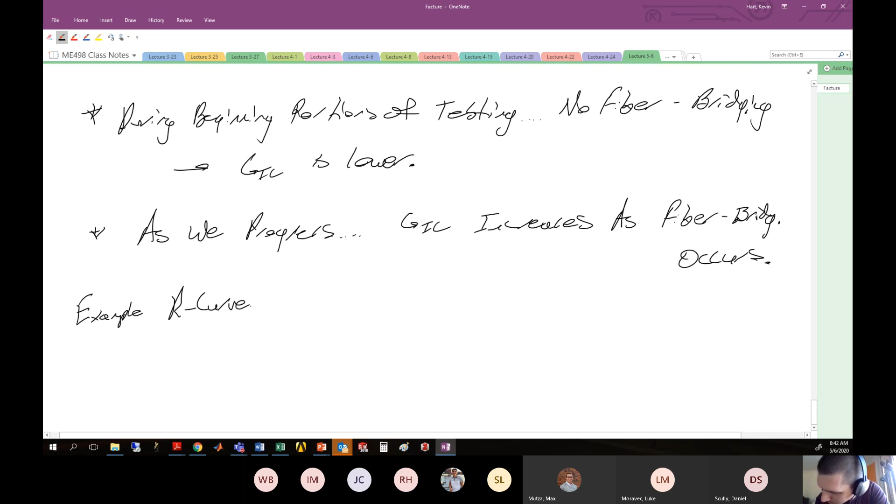So let's say you have 10 fibers holding on as you propagate your crack. If I propagate my crack a little more such that one more fiber is holding on and I lose one from the other end, then I'm keeping this equilibrium of only 10 fibers bridging my crack plane at any time. But when I first start, I have 0 fibers bridging the crack. Then as it propagates, I accumulate 1, 2, 3, 4, 5, 6, 7, 8, 9, 10 until at the very front I've reached this equilibrium where I only have like 10 fibers holding. Obviously it's a lot more than 10, but I'm just trying to make an example here. So this is an equilibrium where the fiber bridging zone is constant - meaning the amount of new fibers entering my bridging zone by crack propagation is the same as the amount I'm losing from further upstream of the crack. Hopefully we can understand that.

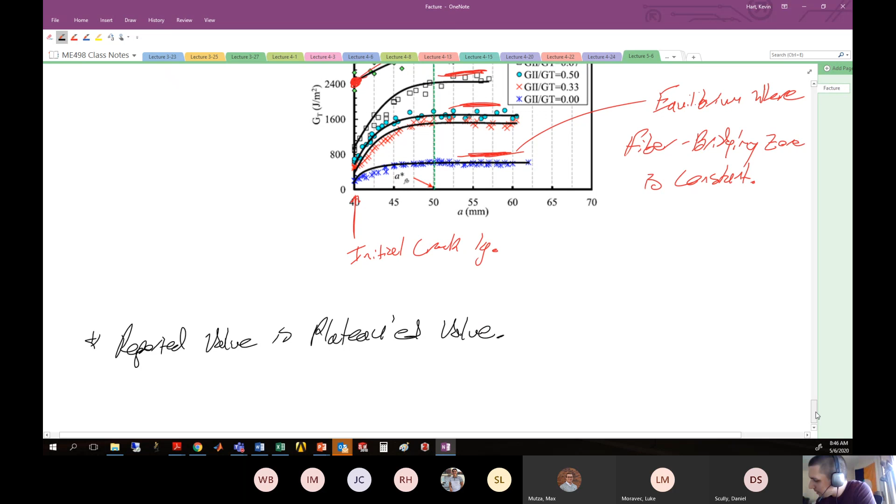So when you see this behavior on an R curve, it starts low and then increases slightly - that's an indication you have significant fiber bridging occurring. The actual critical strain energy release rate, what people report, is kind of an argument, but generally the reported value is the plateau value. That's because in real life you wouldn't have this Teflon inside the piece - you're only using it to initiate and propagate the crack. So you would have fiber bridging in real life, and therefore you want to see what this plateau value is because that's representative of the fibers that would hang on in real life. So if you're doing this mode 1 testing and you see behavior that looks like this, now you understand what's going on.

All right, so that's R curve behavior for fiber bridging. I think that's where we'll stop today.